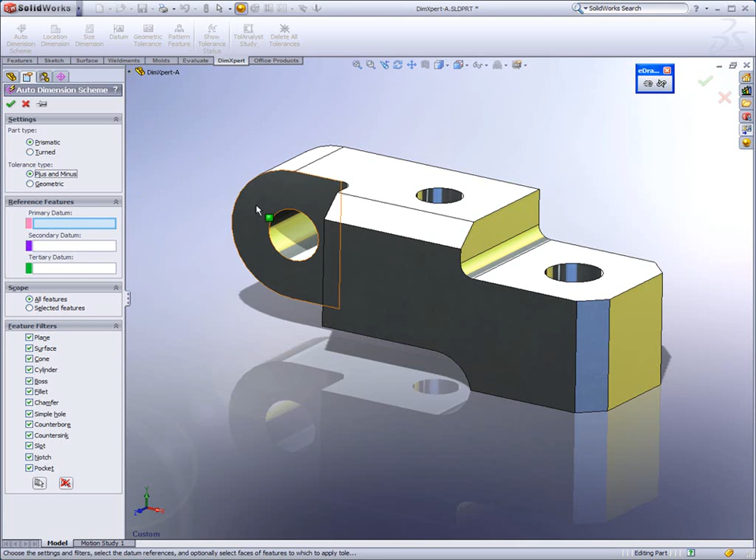Here I'm going to choose a primary dimensioning reference, a secondary, and a tertiary, and we'll go ahead and accept that. And SOLIDWORKS adds a lot of dimensions to my part. Well, in this case here, SOLIDWORKS has interrogated the entire model for all the manufacturing features. Once it's done that, it's applied all the dimensional information for that part.

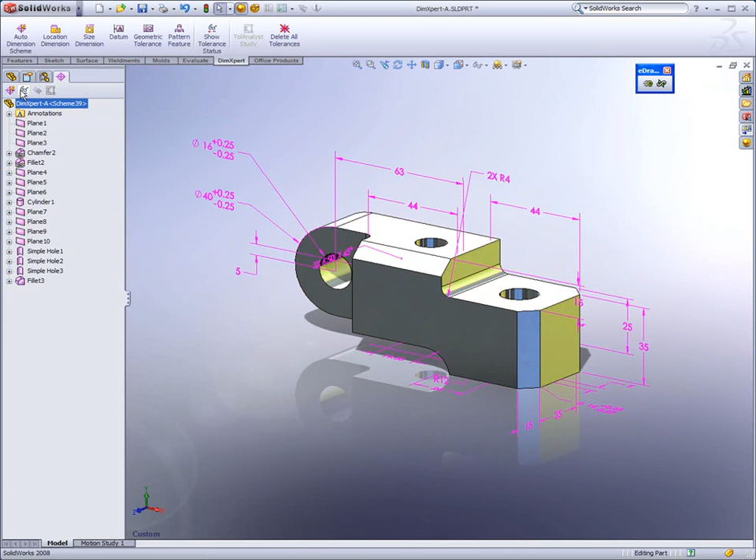How do I know if my part is fully dimensioned? Well, we have a status tool that allows you to do that. Green means go, everything is fully defined. If I had yellow surfaces or gray surfaces, I'd know I'd need to add some additional dimensions manually.

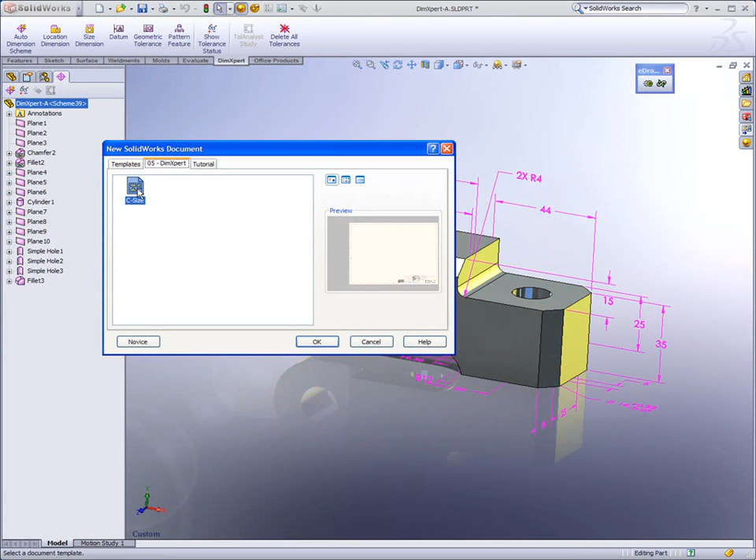Now we all know that many people have to still detail their models, so we're just going to leverage this information that we just created and just create a drawing of it. So here we're going to import dimensions and leverage those DimXpert annotations and just drag out our views. All those dimensions come across, add an isometric view as well.

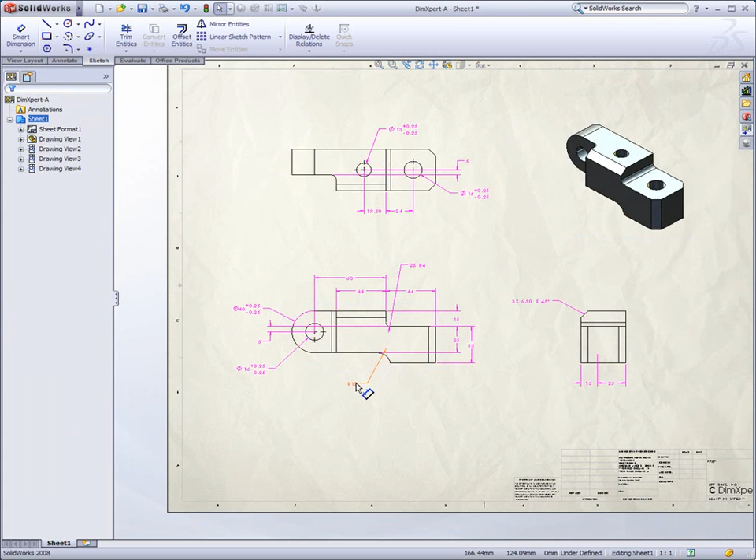And then maybe we want to have a little color on our drawing, so we can do that as well. And here all I have to do at this point is a little drawing cleanup and I am ready to go. Fully detailed drawings. Let's take a look at another part here. This one here we're going to do a little bit differently.

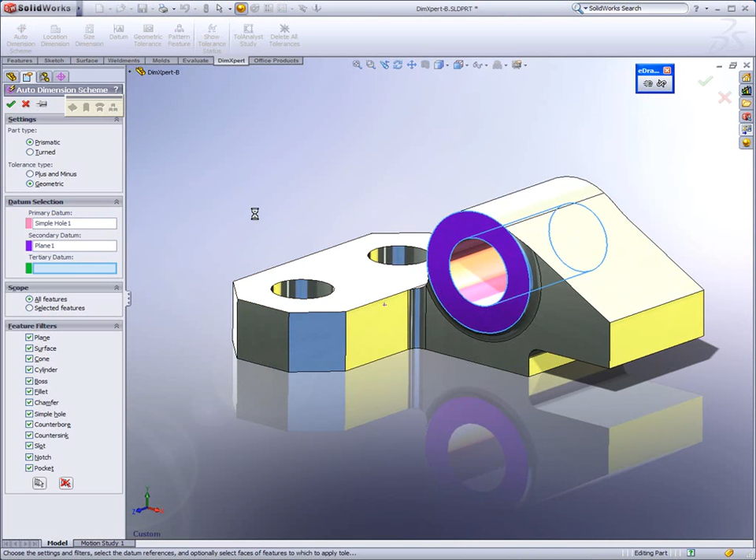We are going to do an automatic dimensioning, but this time using GD&T standard. Here we'll choose the primary dimensioning references, this hole, and then this face as well, and we'll go ahead and accept that. Again, SOLIDWORKS goes out and adds all those annotations automatically for me, so I really don't have to do any thinking or any worrying about whether or not I've added all the appropriate dimensions.

How do I know if I have all the dimensions? Well, we give you the status tool. All the faces that are green are fully constrained, fully defined for manufacturing purposes. Now, before, we created a drawing of this part, but some of our customers don't create drawings at all. They actually use 3D annotations.

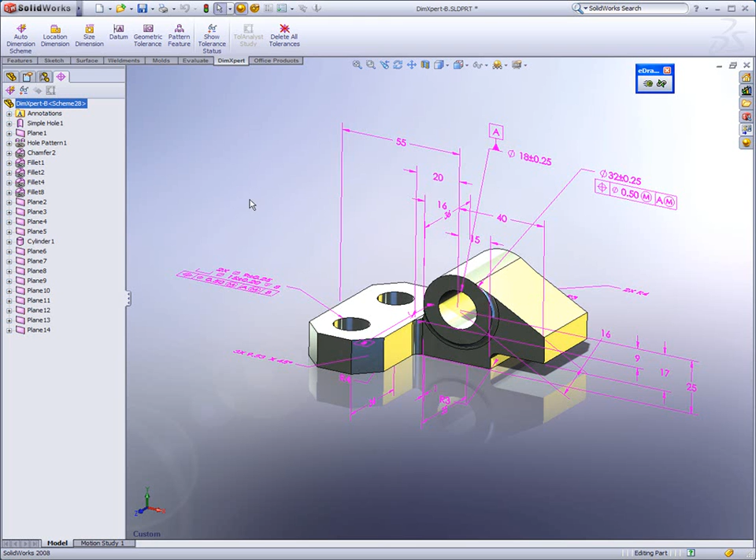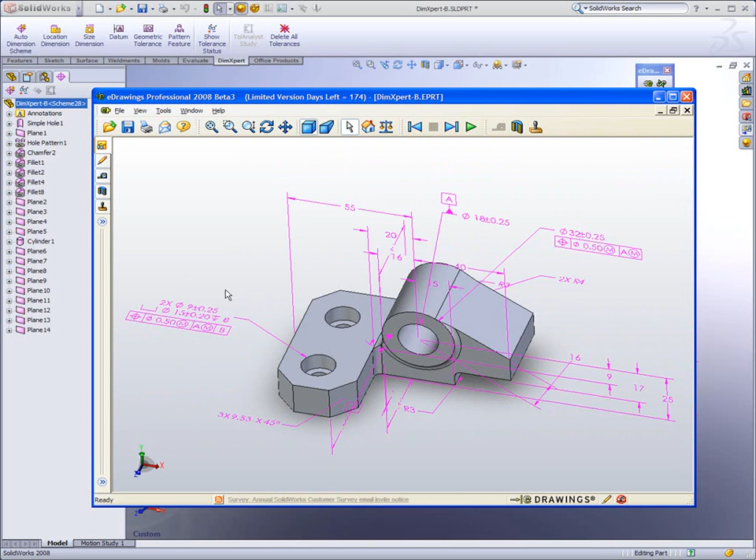So here we can publish this as an eDrawing. They can open it up and then have access to all the GD&T information that was previously created for this particular model. So you can see all those dimensions have now come across in our eDrawing, and all the information required for this particular component to be manufactured or inspected. It's all right here on this eDrawing.